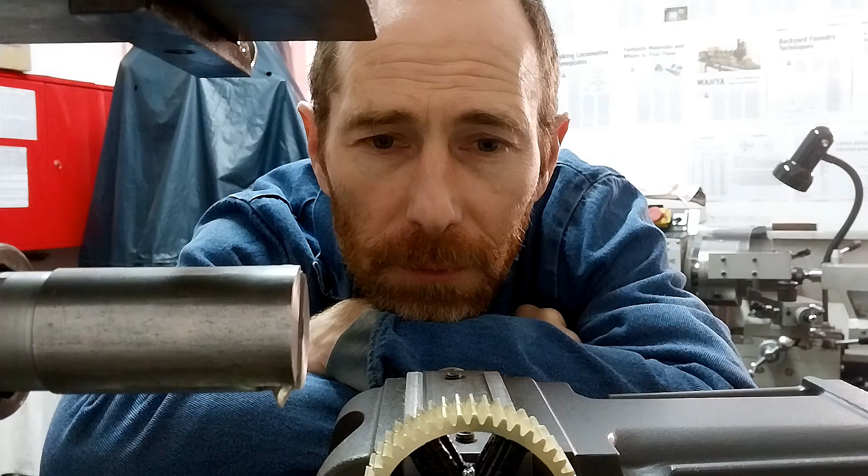I think somewhere along the line, model engineering has lost its way a bit. All too often you hear about guys who buy very expensive tooling to do simple jobs. A good example is cutting gears. If you buy a full set of gear cutters, it'll set you back a pretty penny, but you actually don't need to.

It will be perfectly acceptable in a home workshop to cut gears without buying anything. In this video, I'm going to show you how to do that, and how to cut the keyway in the middle of the gear without buying an expensive broach. All with stuff lying around the home workshop, nothing fancy, just using bits and pieces. I hope you guys enjoy this video.

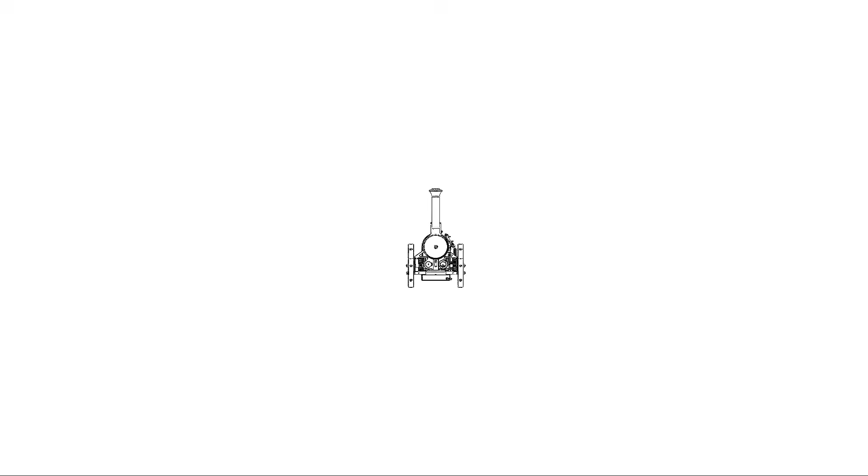Something different. So let's have a look at a little bit of theory for gears. I'm not going to go into Hertzian contact and stresses in gears and all that stuff, because let's be honest, an online gear solving program will do that for you, so the chances are you don't need to worry about it.

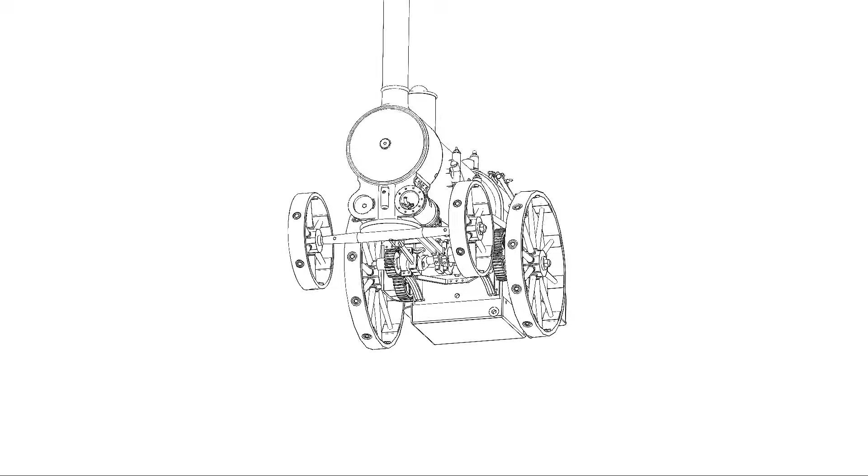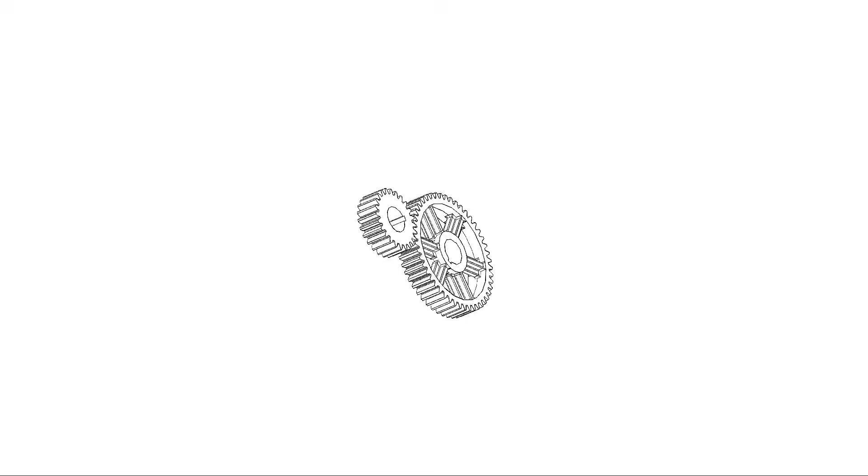There is, however, one parameter you do need to worry about in the home workshop, and that's the gear modulus. In simple terms, all the gear modulus does is make sure adjacent gears mesh properly. In theory, it's just a ratio of the pitch diameter to the number of teeth. Think about that for a second: if you have a uniform gear modulus, it just tells you that a very large gear will have far more teeth for a given pitch diameter, while a smaller gear will have a lot less teeth. Then you know your teeth are more or less the same size.

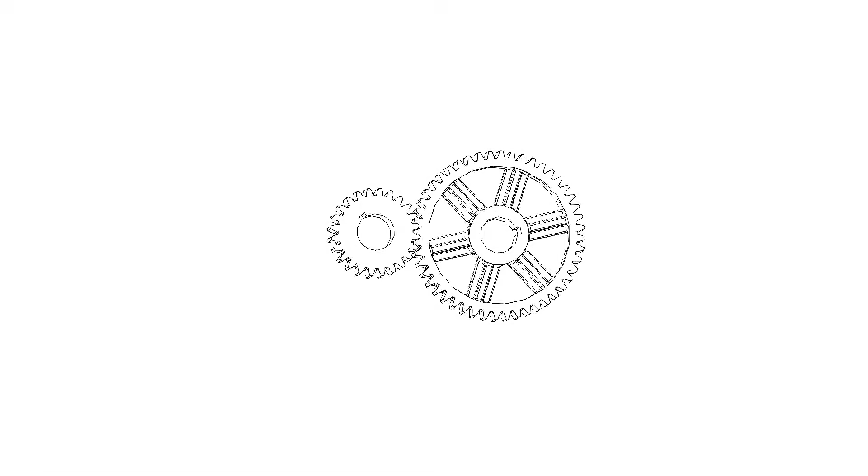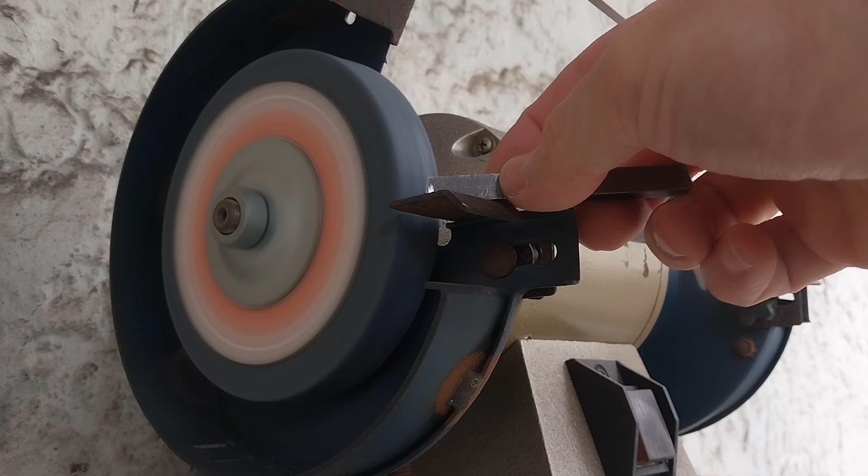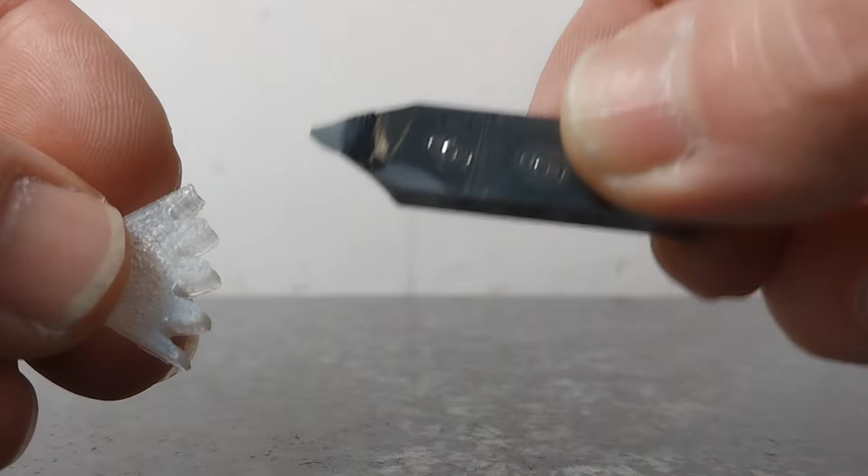Now, what happens in industry is your gear modulus cutters are standardized to a certain degree, so you get sort of 1, 1.5, 2, 2.5, and so forth. They've standardized in industry so that all gears are cut to a standard gear tooth profile. Unfortunately, that creates very odd gearing ratios. If you look at a gearbox of a car, you'll notice a lot of the gears are very weird ratios, like 2.01 and 1.07 and so forth.

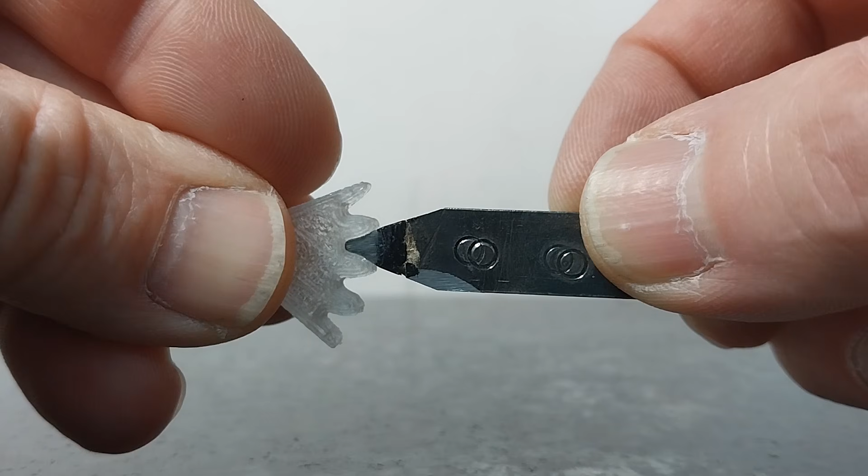But in the home workshop, your gear modulus can be whatever you want it to be. In this example, I wanted a gearing ratio of 2 exactly. What that does is allow me to use one change gear to cut both of my gears.

So this is the smaller gear. It is a 24 tooth, and I'm using a large change gear of the lathe, which is a 48, so I'm skipping every second tooth. Check how easy it is to index for cutting the gear.

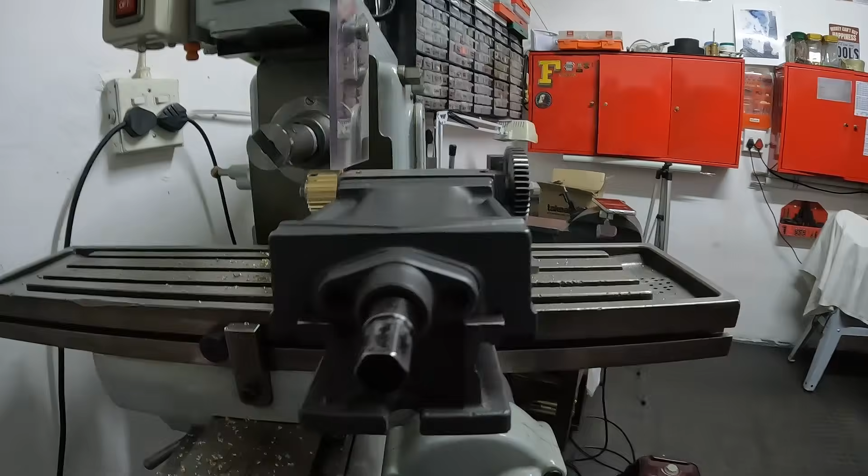Just like that, and drop the table down to 0. What I always do is just run it once, and it needs to just touch, and then I know I'm back on 0.

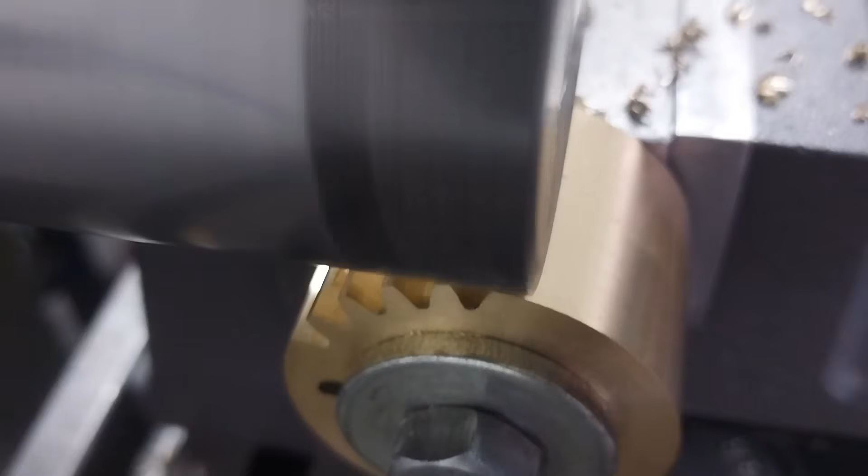Now I'm doing quite big cuts, 1.5 mil cuts, and the gear profile is about 3.3 down, so there's only 3 cuts per gear. So this actually goes really quickly.

Everyone says a single tip tool doesn't cut nicely, but look at that. So now we're doing another 1.5 mil cut. I've got a hand feed, and typically what I do is I actually listen to the tool. See there, it's got a different sound, and that's the feed I'm looking for.

So these are big chips, 1.5 mil feed, but it's 3 millimeter down, so it's cutting the whole profile. Then right at the end, I just do a very small finishing cut of 0.3, and that cleans up the tooth nicely.

Incidentally, I'm cutting 2 gears at once, and I would recommend doing that anyway because it saves you a whole lot of time, but also there's a lot more support and you're getting a nice cut on your tool. Just like that.

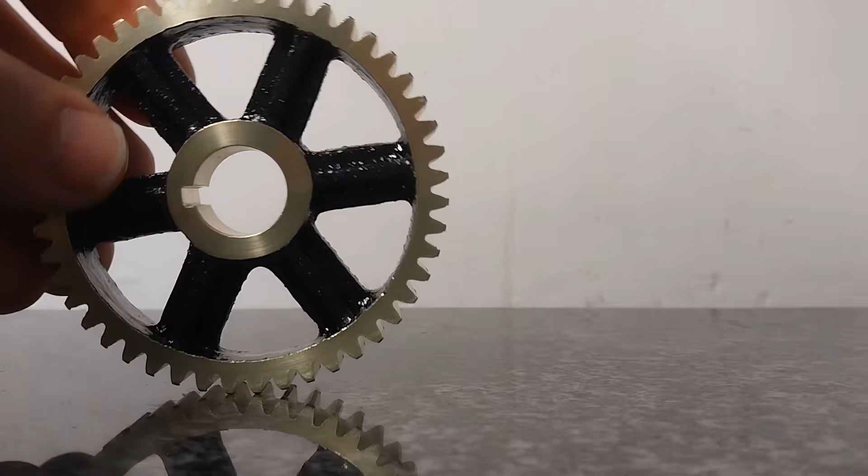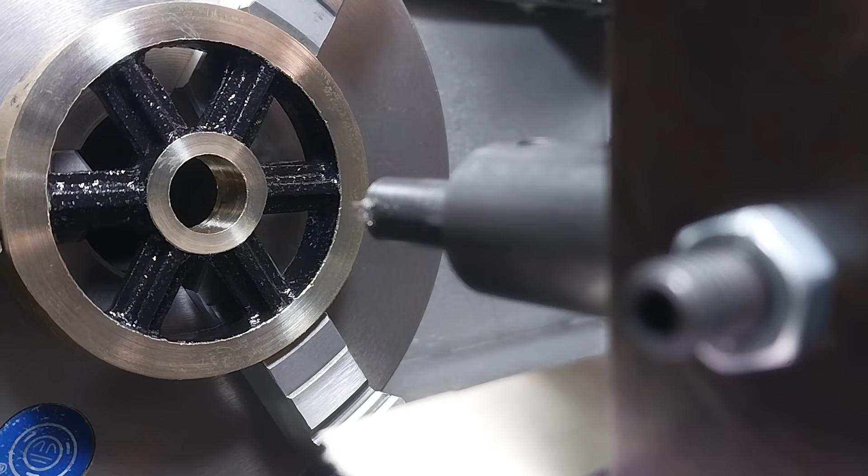Then finally, I promised to show you guys how I do the keyways for my gears. I use the exact same method for the keyways in the larger wheels of my loco. I do this on my lathe, and I've made a planing attachment that just attaches to my lathe. Each stroke of the tool typically cuts between 0.1 and 0.2 millimeter, and that feed is governed by the cross slide and the dial gauges and so forth.

That's really, really easy to do. Cutting a keyway on a relatively large wheel, or this sort of keyway in this gear, will only take about 10 minutes. It really is a very quick and easy process, and it is way cheaper than buying an expensive broach.